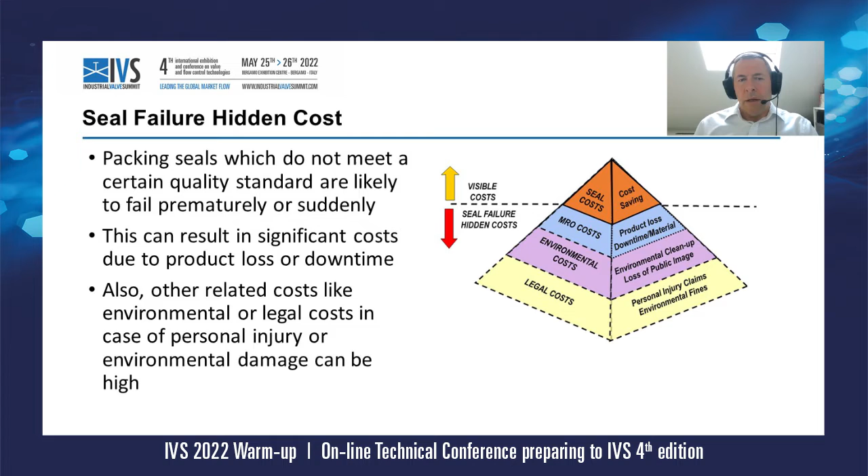There's an old British standard in existence to define quality aspects of a packing material. It is BS 4371 from 1999. But this standard has not been maintained, is now very outdated, and it does not include modern packing materials. It even still describes asbestos materials which have been long banned in the European Union.

The members of the Packings Division of the European Sealing Association and the Fluid Sealing Association have developed an up-to-date specification for gland packings, defining good material specification. In the following, I will give you more details about this new standard.

A specification for gland packings manufactured from yarns and ribbon has been developed by the ESA and the FSA over the last 3 years. Now the final draft for the packing material standard has been approved, and this specification provides a method of describing the materials, the impregnates and lubricants for various types of yarn and ribbon-based packings intended for use as gland seals in mechanical equipment such as pumps and valves.

In the first part of the specification, the yarn groups and materials are defined. There are 6 categories, including natural yarns, glass, ceramic, synthetic, PTFE, and carbonaceous yarns. In the group, the most common materials are listed and they are given a yarn code for identification. So, for instance, in the natural yarn group, there are ramie, cotton, flax, hemp. In the glass and ceramic group, there's glass, ceramic yarns, and mica.

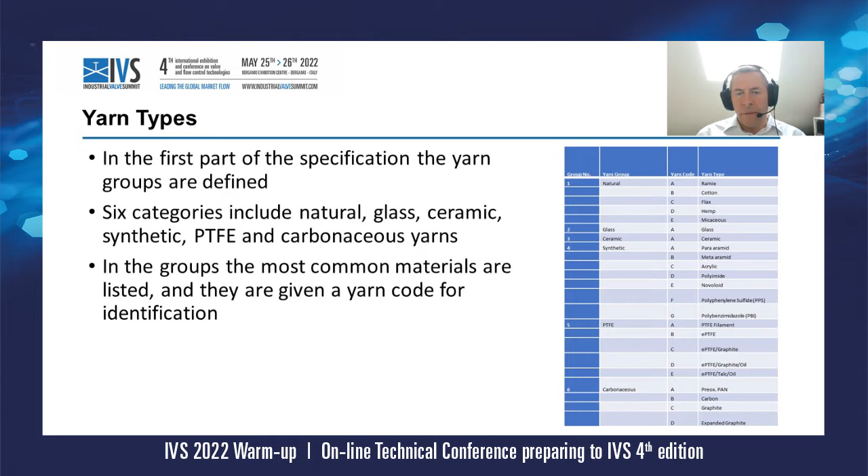In the next material group, the typical impregnants and lubricants used in packings are listed in a separate table, and they also receive an associated code. It can be basically that there's packings using no additional impregnant or lubricant, but the main ingredients added into a packing are PTFE, mineral grease or oil, silicone grease and oil, graphite and mica as impregnants or lubricants.

Additionally, the packing or the packing material can be also reinforced, and also for the type of reinforcement there's a separate table listed and coded again. So there can be no reinforcement, or glass, cotton, carbon, PTFE filaments, stainless steels, or Inconel can be used to reinforce the packing material.

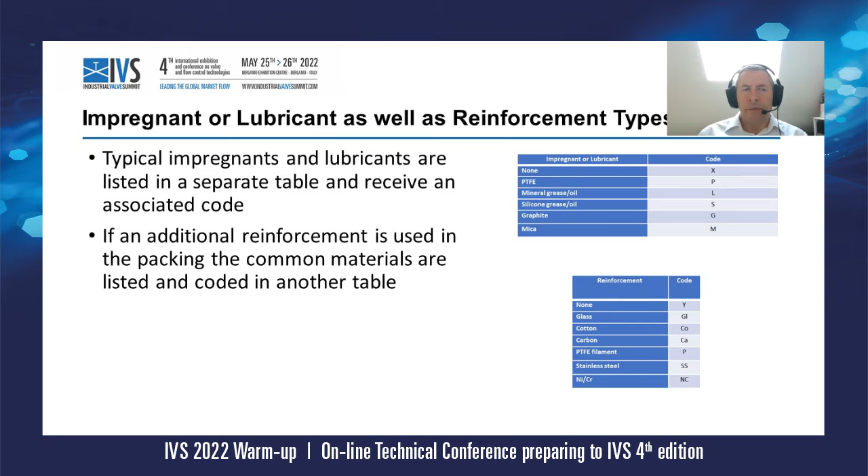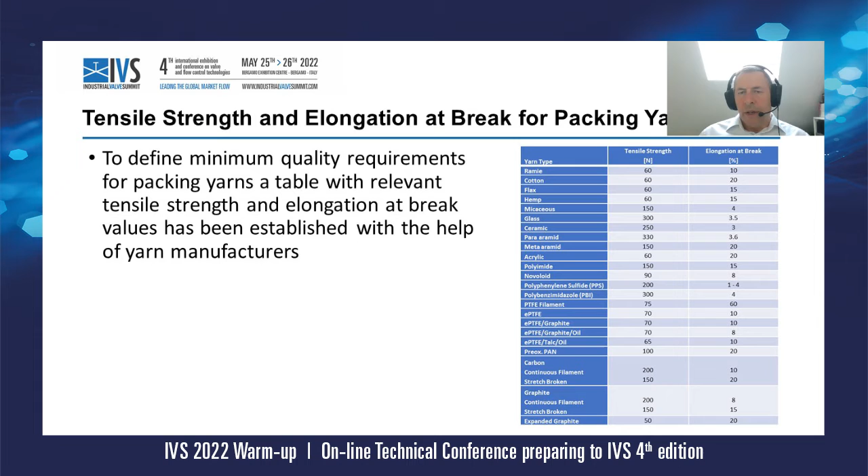Important characteristics for the good quality packing yarn are the tensile strength and the elongation at break values. In the standard, the table has been defined with minimum values here with the help of yarn manufacturers to make sure that the packing yarns will perform and that the packing can be produced and braided without any problems, as well as guarantee that the packing will perform in the application under elevated temperatures as well as pressures.

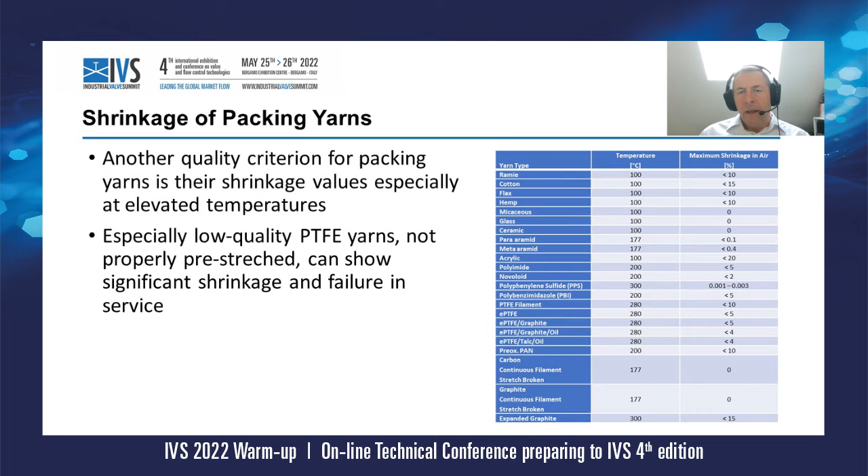Another quality criterion for packing yarns is the shrinkage value, especially at elevated temperatures. A table here has been also created with the help of manufacturers to show certain shrinkage values or maximum shrinkage values in air at elevated temperatures. Especially, for example, low quality PTFE yarns not properly pre-stretched can show significant shrinkage and failure in service due to extrusion and related high gland pressure losses, but also with other materials which show high shrinkage problems can occur and the service life will be shortened.

Another quality criterion for packing performance is the creep relaxation under gland pressure. Unfortunately, for specific packings or packing materials, there were no specific creep relaxation values available. So the packing division decided to run their own test, and one of our members is the company Amtec Messtechnischer Service, who's specializing in testing of packings, gaskets, as well as valves. So we set up a test, and 16 of the most commonly used packing materials were defined and provided by different ESA members.

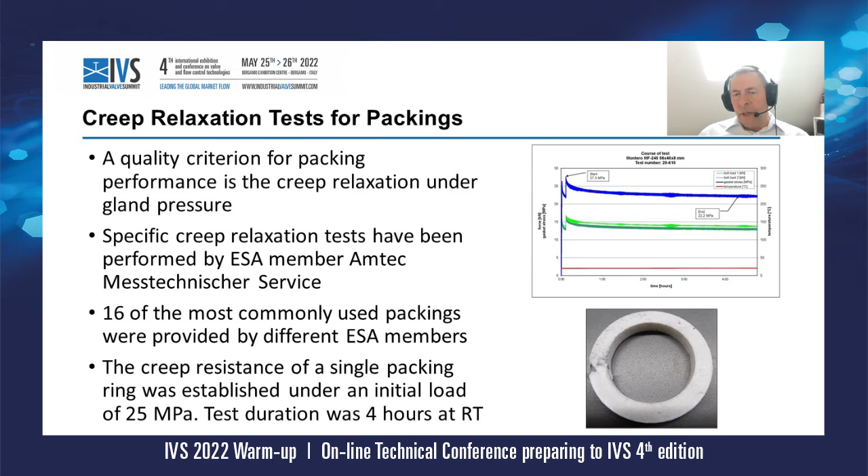The creep resistance of a single packing ring was established under an initial load of 25 MPa. The test duration and the holding time was 4 hours at room temperature. In the graph here you can see one of the test results. So the packing was submitted to the 25 MPa, then there was a short holding time, and then it was retightened to 25 again, and then the relaxation or the gland pressure loss over 4 hours was measured. And also after finishing the test and when the rings were extracted, the extrusion was checked.

Based on the test results, minimum creep relaxation values have been determined and put into a table, which you see here on the right hand side. The table shows the different packing types that have been tested. We start with ramie, PTFE and oil, cotton grease packings, para-aramid and meta-aramid, both with PTFE and oil impregnation, acrylic, PTFE and oil, polyimide, PTFE and oil, Novoloid, PTFE impregnated, PTFE filament packing with a PTFE dispersion, ePTFE, and the different types of ePTFEs, graphite with oil, and talc and oil, and then the carbon-based packings like PreOx PAN with graphite PTFE impregnation, carbon filament with graphite impregnation, graphite filament, graphite impregnation, and expanded graphite reinforced with Inconel.

You see the difference here in the creep values for the typical pump packings which contain a grease or lubricant as a running-in lubricant. These values are quite low because again the oil will run out under pressure, which is intended for pump packings to counteract the heat dissipation. For the valve packings we have significantly higher values, which really starts for PTFE with creep values bigger than 75, or for carbon filament values bigger than 80%, and with expanded graphite reinforced with Inconel we have values that are even bigger than 90%.

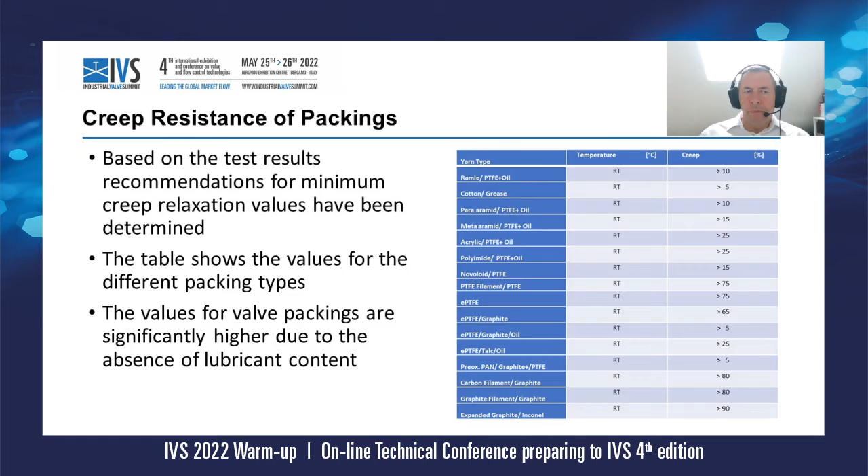Besides the specific values that have been shown in the previous slides, other criteria are also defined in the guideline. For example, for the pump packings, again, the grease, oil or binder content, because this shouldn't be too high, because again, a high amount of grease, oil and binder will give a quite high creep relaxation or volume loss, and the packing won't last that long in the application.

Then again, the dimension and tolerances are defined that a good quality packing should have, because that's important to install it without any problems. And also the packing density and tolerances are given, because again, certain density values for packing will make sure that sufficient impregnation is in the packing. Also, in addition, there are certain guidelines given for the packaging and the marking of the products, which is also important to protect the product and when it is stored to make sure that it will maintain its storage time.

Some of the packing criteria mentioned in the standard, international standards or guidelines are already in existence. They are all referenced in the document. But then again, we also produced a quite extensive appendix for test procedures that had to be defined to make sure that the quality standards can be met.

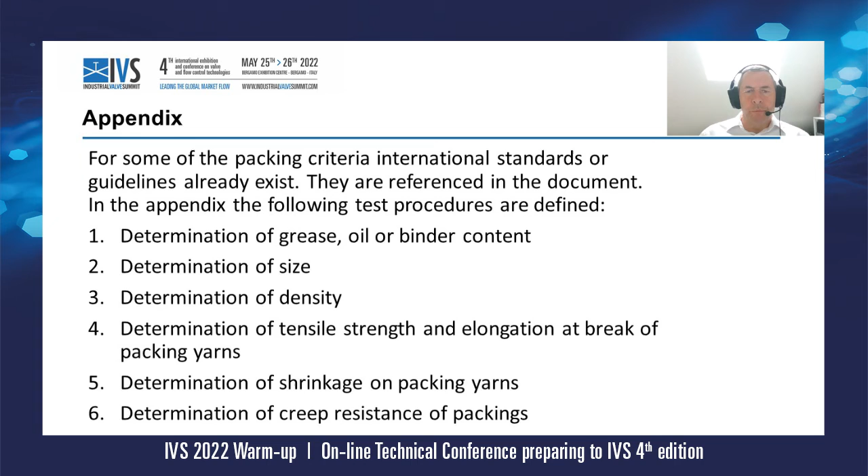To sum up, a new guideline to define good quality packing materials as well as packings has been established and approved by ESA and FSA packing division members. It has been forwarded now to CEN as a new work item proposal to establish an EN standard. We hope the proposal will be accepted and we can develop our draft then into a recognized standard which can be used to define good quality packings as well as materials.